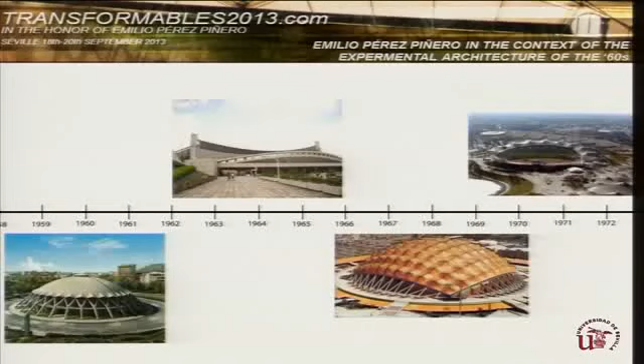This evolution can be clearly perceived in the space built for the Olympic Games, where the latest technological innovations are usually displayed. In the image, you can have a look at the Olympic stadiums of the 60s. Luigi Nervi built the Palazzetto dello Sport in Rome in 1960.

Kenzo Tange performed the Yoyogi National Gymnasium in Tokyo. In 1968, Félix Candela built the Palacio de los Deportes in Mexico. And finally, Frei Otto's Olympiastadion München.

The modernist movement was the first to consider that reformulating the concept of space could result in new architectural forms. They bet on creating new forms that did not always respect the principle of formal unity of classical forms. With the development of new building techniques based on reinforced concrete, non-spherical curved surfaces came up again.

They moved away from rational conceptions, betting on other forms more suitable to capture the futuristic fantasies, mutant buildings, and walking cities, which live in the architect's imaginations. The New Expressionism trend was one of the pinnacles of the new architecture, introducing twisted and warped forms as a way to obtain originality and novelty in design.

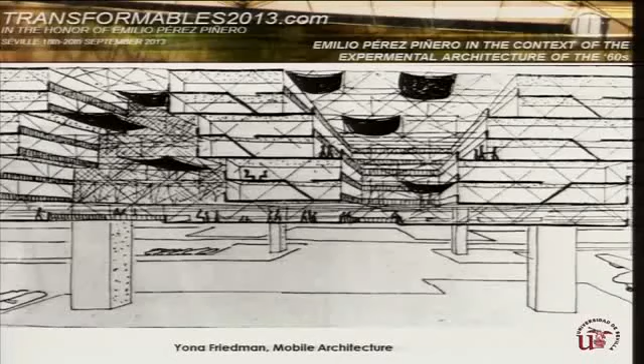Other visionaries of the time were Yona Friedman and Eckhard Schulze-Fielitz, known for their modular city and cutting-edge design. They exchanged ideas in the Groupe d'Études d'Architecture Mobile, founded in 1958. Working under the principle of mobility, variability, and flexibility, this group tried to create an innovative utopian alternative aiming to solve housing problems. As a consequence of their lack of material resources, their architecture was compatible with ecology and sustainability.

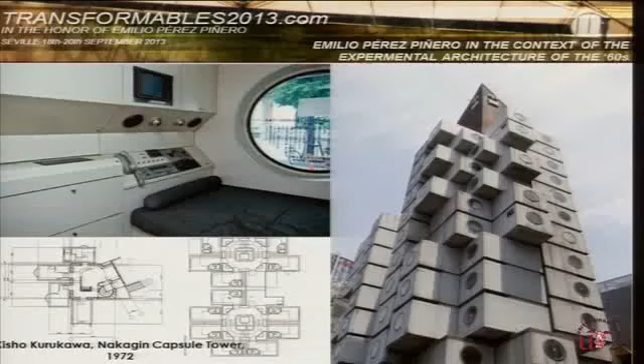His modular city-urban conception later turned out to be suitable to manage population migration, and what at first seemed to be a utopian idea has become a reality in today's development projects in Africa, Asia, and Latin America. Friedman's proposal inspired the Japanese avant-garde group called Metabolism, whose leader was Kisho Kurokawa.

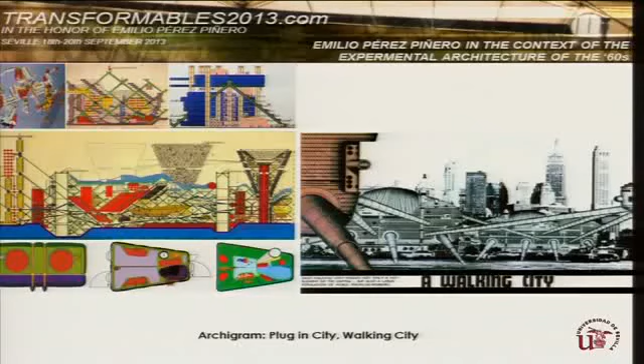At the same time, a group of young avant-garde architects formed the Archigram Group within the Architectural Association of London. From 1961 to 1974, they edited a homonymous magazine with their theoretical and utopian projects. Known as the Beatles of architecture, they criticized the architectural culture of the time, drawing inspiration from technology. Their proposals, only expressed by hypothetical projects, were basically inspired by comics and social movements. Plug-in City and Walking City are two of their most famous designs.

Unlike other architects, he didn't confine himself to utopian experiments, but he actually carried out his projects through structures which provided solutions to real practical problems. Throughout his career, Pérez Piñero always searched for the perfect balance between matter and form, always trying to economize in resources, transport and assembly time.

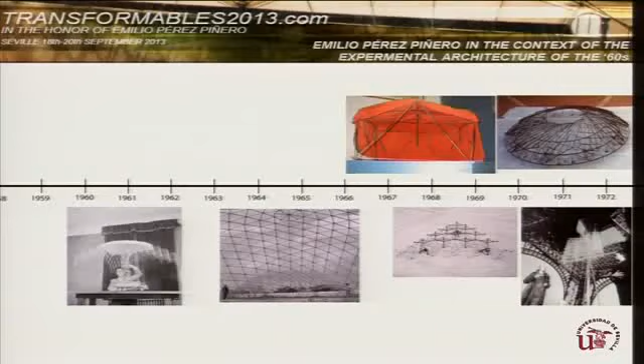Pérez Piñero had to face a new challenge in every new structure. His working method consisted in building scale models where he could test the structure performance. In his first work, the deployable traveling theatre, he tried to solve the general problems arising in any given theatre, bearing in mind that his particular theatre had to be a portable building. To do so, he innovated technically by creating the first space frame easily, quickly, and simply assembled, whose transport and storage didn't involve an excessive volume or weight.

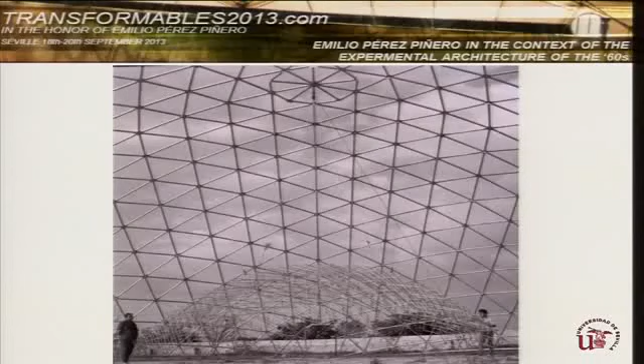The idea of transporting structures by helicopter also appeared in Fuller and some of Archigram's illustrations. Fuller was on the cover of Time magazine in 1964, and the designs of Archigram date from 1966. However, while Archigram confined themselves to drawing how helicopters could transport structures in their Plug-in City project, Pérez Piñero had found a real solution to the transport, assembly, and dismantling of large-span structures. His solution consisted in making good use of inner and upper nodes. The dome would fold and unfold depending on the particular nodes pulled up by the helicopter.

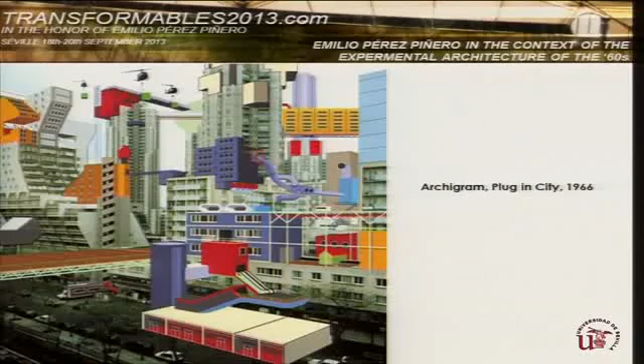A few years later, Pérez Piñero traveled to Mexico to join Félix Candela, with the purpose of introducing his patents in the North American market. At the beginning of 1969, he got his first opportunity. Candela had received a letter from the Structural Engineering Division of the US Navy, in which they showed interest in employing one of Pérez Piñero's structures for the installation at a geodesic operational base in Antarctica.

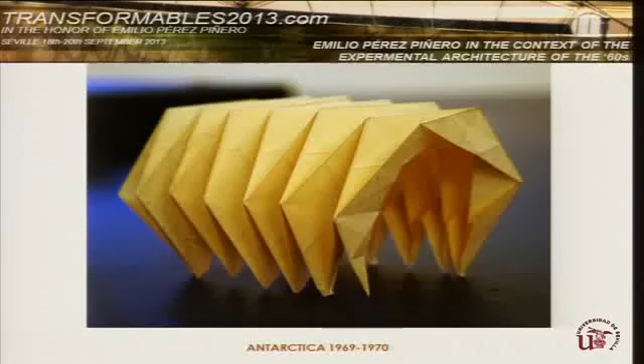The project consisted in creating an easy-to-assemble collapsible type of barracks. The structure should be provided with special cladding in order to bear extreme thermal conditions. To fulfill his assignment, Pérez Piñero carried out tests on a modular paper model called Antarctica 1. This is Antarctica 1. Later developing his ideas on an unfolding tent called Antarctica 2. This name had been catalogued by the Foundation.

When they thought that the contract was about to be signed, the Mexican intelligence services made the deal fail by holding the correspondence of Candela, who was a political activist, and thus finished Pérez Piñero's Antarctica dream.

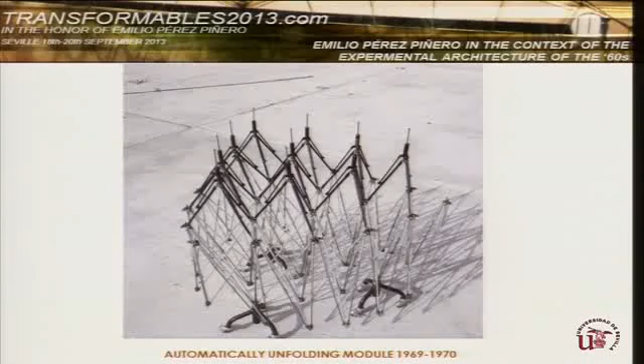The same year, Pérez Piñero came up with another innovation, creating a module which could serve as a greenhouse on the moon. After having received a letter from NASA, Pérez Piñero quickly initiated the study and adaptation of one of his designs. In only 20 days, he built a deployable system to be put in the satellite. This project was called Automatically Unfolding Module.

When his solution arrived at NASA, it was too late, and the project was abandoned. The Mexican intelligence service had blocked Candela's mail again. The delay prevented the project from being submitted in time. In the slide, we can read Candela's words: it could have been wonderful if the first structure erected on the moon had been built in Calasparra.

In the middle of 1971, Pérez Piñero designed in only 20 days his hypercubic glass roof commissioned by Salvador Dalí, in order to close the open-air gap lying between the stalls and the stage of the Dalí Theatre Museum in Figueras, Gerona, instead of building a traditional flat glass roof. The architect preferred to adapt one of his old ideas from when he worked on the design of extensible antennas for artificial satellites.

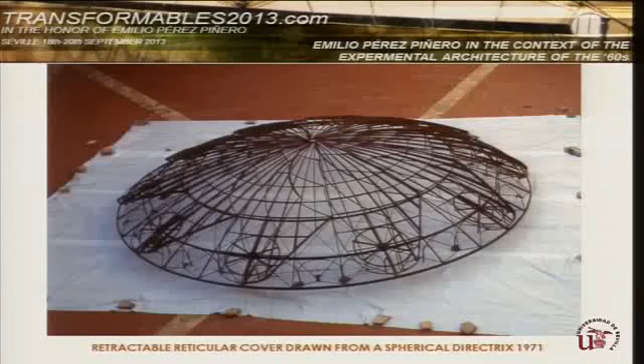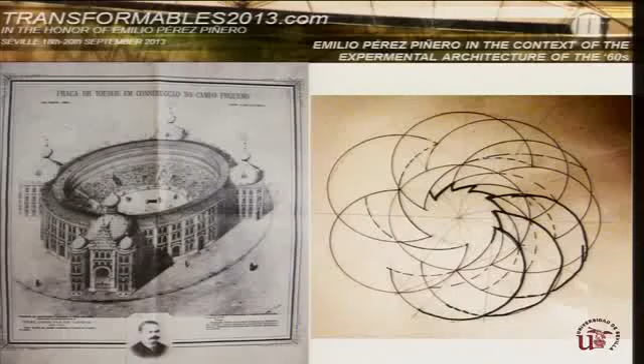On the grounds of the technique used, historiography considers Pérez Piñero's retractable reticular cover drawn from a spherical directrix as his last futuristic utopian design. This project would make the Campo Pequeno bullring in Lisbon one of the first indoor bullrings. For several months, Pérez Piñero worked on the retractable cover, which consisted, as its name suggests, in a dome from a spherical directrix, provided with a retractable roof. He was inspired by the mechanism of the diaphragm of a photo camera.

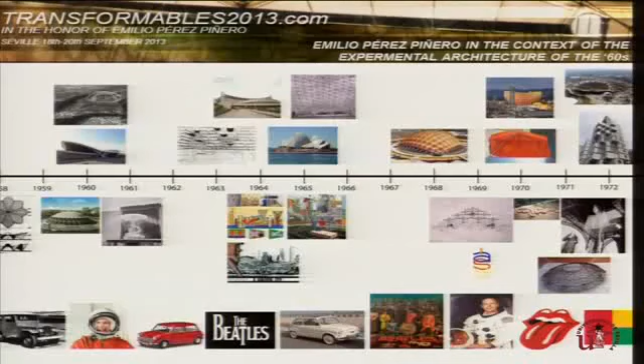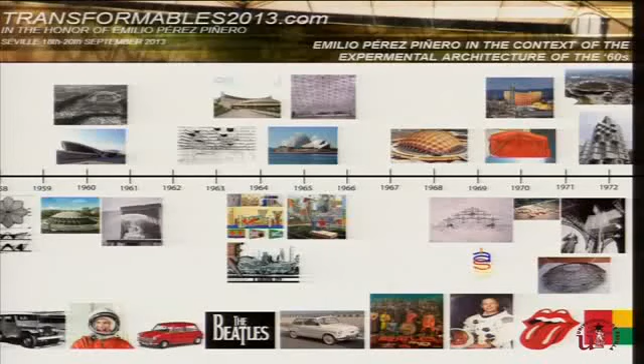This paper has intended to provide a wider understanding of the works of Pérez Piñero in the context of the utopian and experimental architecture of the 60s. Despite living in an isolated country, his works had a great impact abroad. The architect was aware that geometry was the basic tool for the design of any structure. Thanks to his ability, he found many structural solutions, several of which have not been surpassed yet. In these proposals, he searched for a rational architecture which should be able to adapt to the needs of every particular case, always working under a strict economy, making good use of recycled materials.

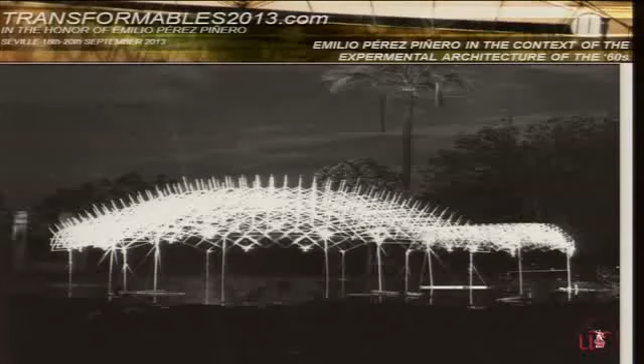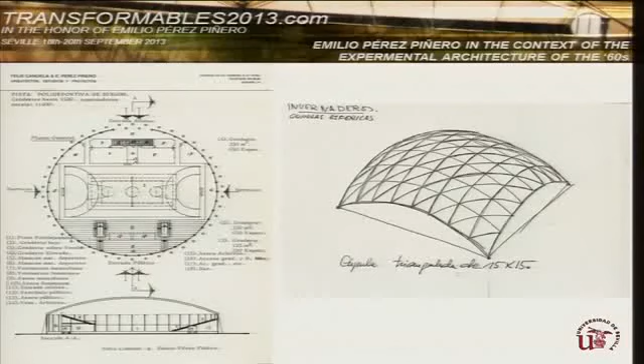He became a legend in the field of folding and modular space frames, many of which have not been bettered with current technology. In addition to the quoted works, he also produced a transportable pavilion for expositions, a transportable cinema theater, the Cinerama system, theorized on mobile sport courts, greenhouses for fruit or vegetables, and so on. With almost no resources, helped by photocollage, an elementary technology, he was able to place his designs at the international forefront.

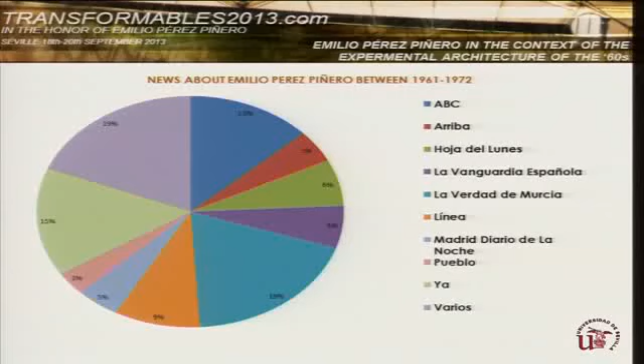When he died, the General Director of Urbanism, Mr. Emilio Larrodera, and the General Director of Information, Mr. Carlos Robles Piquer, stated that his loss was irreparable for the country. Among the more than 80 condolence telegrams received stood the one sent by the current King of Spain, at that time Prince of Asturias. When he died, his family lost a loved one, but architecture lost a genius.